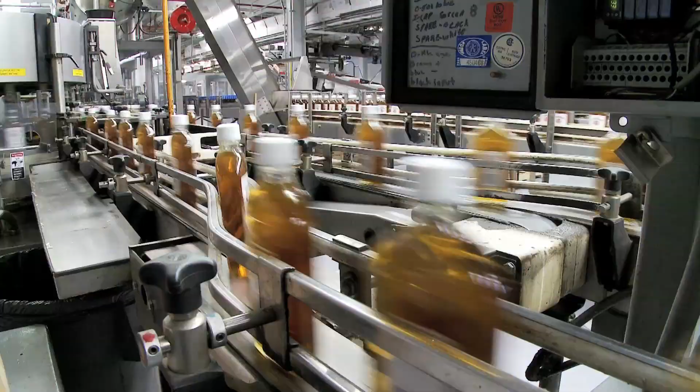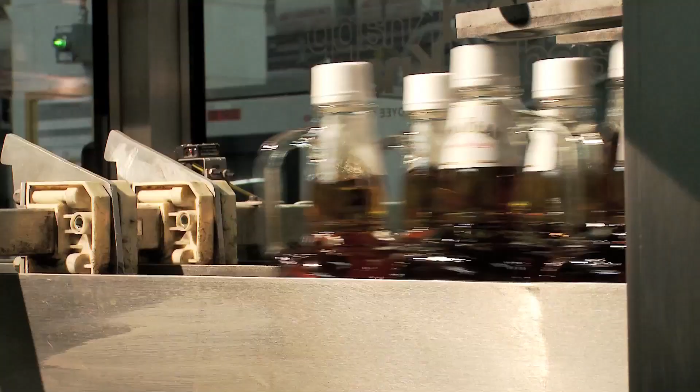Jim Beam Bourbon has stayed true to its original recipe for over 200 years, and as time and technology marched on, the manufacturing processes at the Jim Beam facility have kept pace. This brand-led company relies on strong leadership to invigorate and enhance the company's way of working.

Since 1992, Wonderware has been Jim Beam's partner for automation and information software solutions. These solutions have been supported by Wonderware Cincinnati, the local Wonderware distributor. Originally, Wonderware software was chosen because of its ease of use and its ability to interface with existing PLCs.

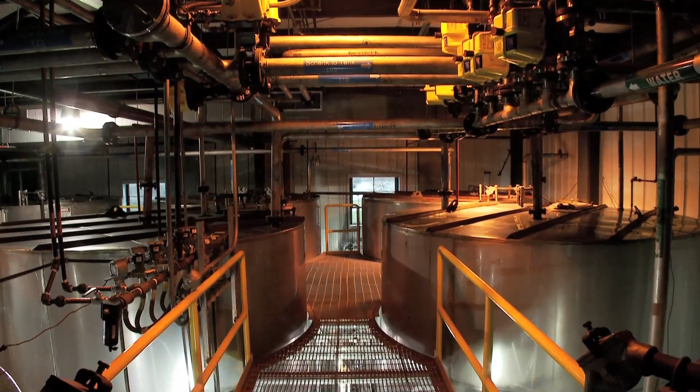A lot of the operators were hesitant when we first introduced Wonderware, but we found that the ease of use is highly important to us with our operators. As we've implemented it in certain areas and the implementations have gone well, we've expanded that into other areas.

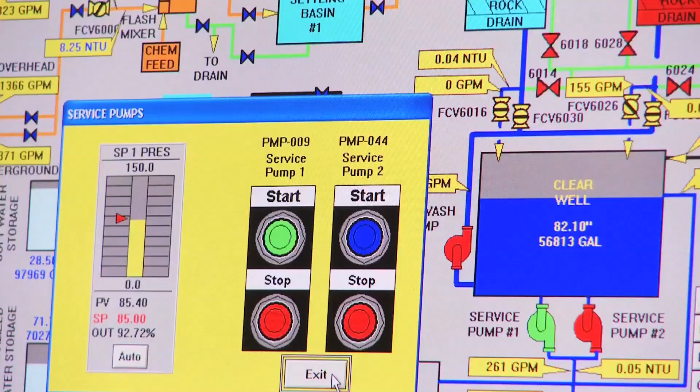The first area I believe that it was implemented was the distillery, and we expanded into our processing and bottling areas. So as we're finding that Wonderware is easy to use, is providing us the data and information that we need, we're able to control our processes consistently, we continue to implement and integrate that throughout our entire system.

As the strength of Wonderware software became apparent to the folks at Jim Beam, it was integrated throughout the plant and has become the software standard.

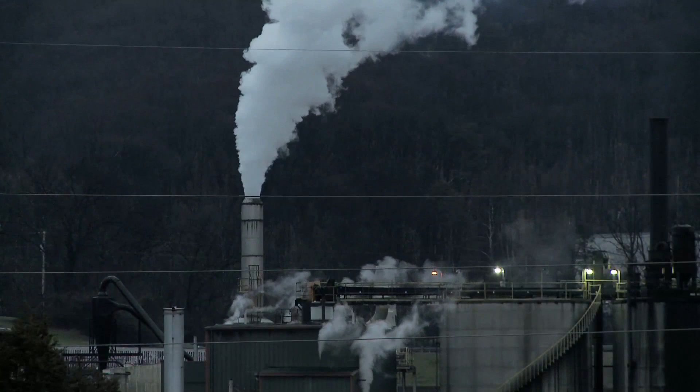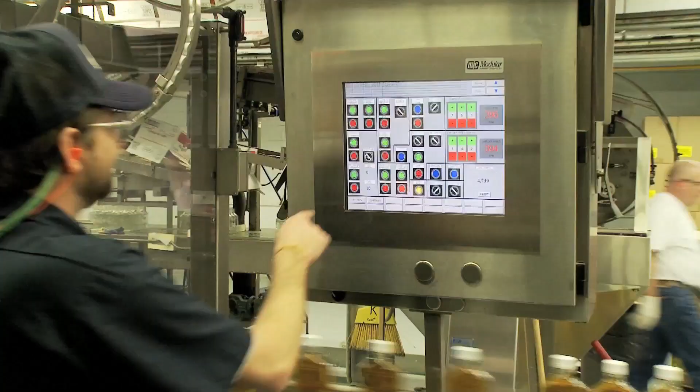In 1994, the dry house at Clermont was automated using InTouch HMI. In 1995, the first InTouch software was added to the bottling line. In 1996, the distillery at the nearby Booker Noe plant was automated using InTouch HMI.

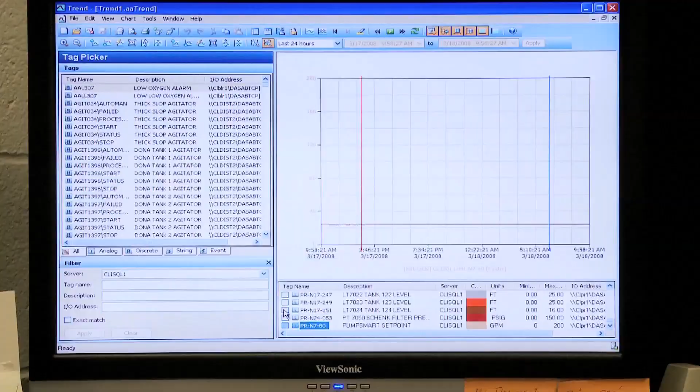The Wonderware Historian software was added in 1997, and once the usefulness of the Wonderware Historian's real-time and historical database capabilities became apparent, the software was added to the rest of the plant. This database tool, coupled with Wonderware Active Factory Trending and Analysis software, have been used for quality and troubleshooting throughout the plants ever since.

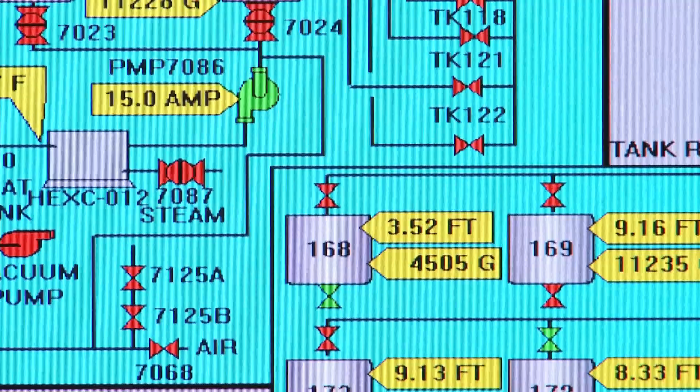With AppServer being a galaxy where all the information resides, we have the boiler, the dry house, and the distillery. InSQL stores all the trends together, and that's one global database for a historian. AppServer kind of does the same thing with the tags, which makes it easier for communicating back and forth between the different operations.

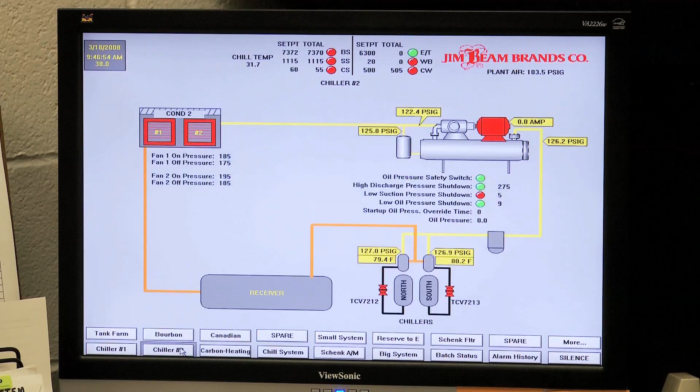In 1998 and 1999, InTouch software was added with the automation of the Jim Beam facility's water and wastewater treatment plant. In 2001, InTouch HMI was included in the automation of the chilling process.

In 2003, terminal services for InTouch software was added as the visualization software on 2 more bottling lines. Also in 2003, the Wonderware Industrial Application Server was chosen for the expansion of the Booker Noe plant.

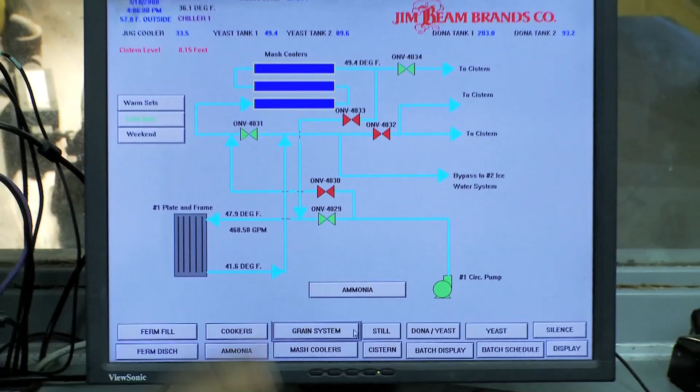The Jim Beam facility in Clermont, Kentucky produces a number of well-known brand spirits, including Jim Beam Bourbon and Knob Creek Straight Bourbon Whiskey. One of our goals in building brands that people want to talk about, it's important that we align ourselves with partners who share some of the same philosophies and goals. We feel that through our partnership and relationship with Wonderware, we've been able to do that.

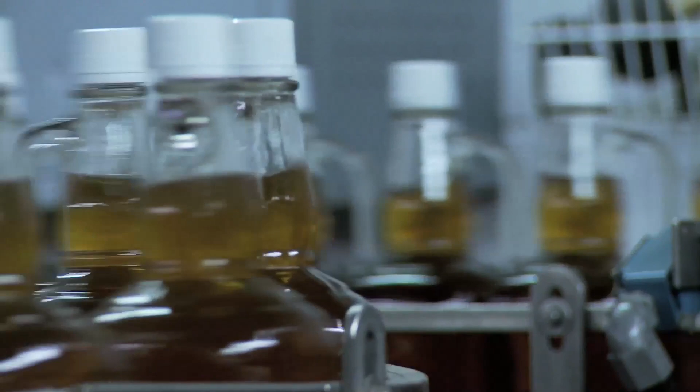2 of the critical underlying principles of Beam Global are to uphold high principles and social responsibility and to strengthen our partnerships. Working together with Wonderware helps enable Beam Global Spirits to bring their vision to life, uphold their commitment to responsibility, and to have a true working partnership with Wonderware to build brands people want to talk about.

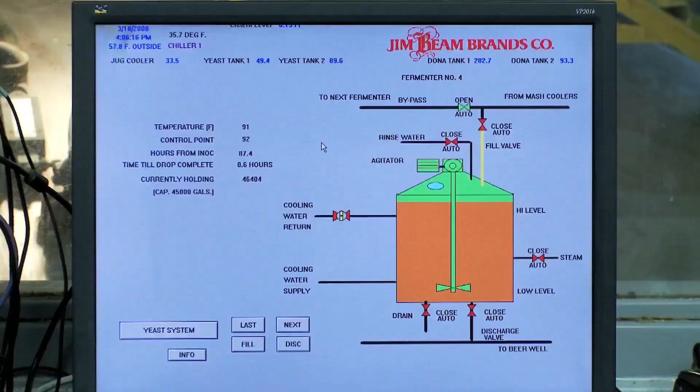I guess our biggest factor when we first started was understanding our process and trying to get it to the computer. Our process was based off of a lot of manual work, and that transition into the computer took us a little while.

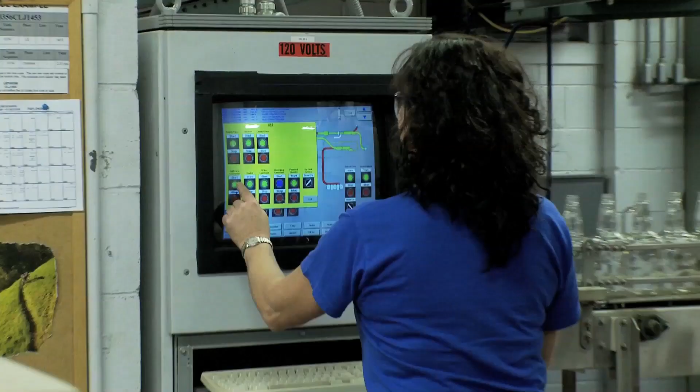But for the operators to be able to run it, they adapted quite well. Within a month, they started to help input ideas to make it a little bit easier to run. Between the work of our engineering department and your tech people, it came together.

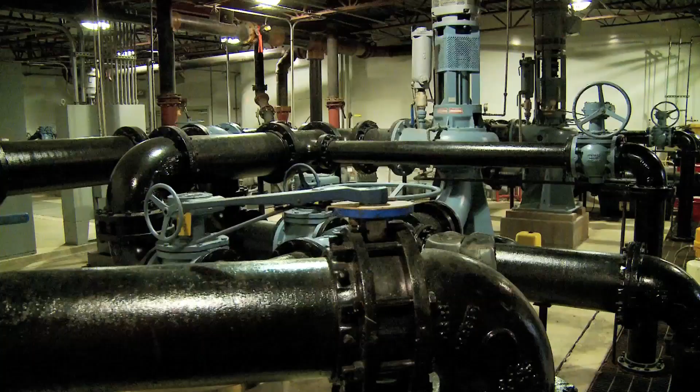Wonderware software solutions are integrated throughout the production process, from the water plant to the boiler house, from the distillery to processing, and finally the bottling line.

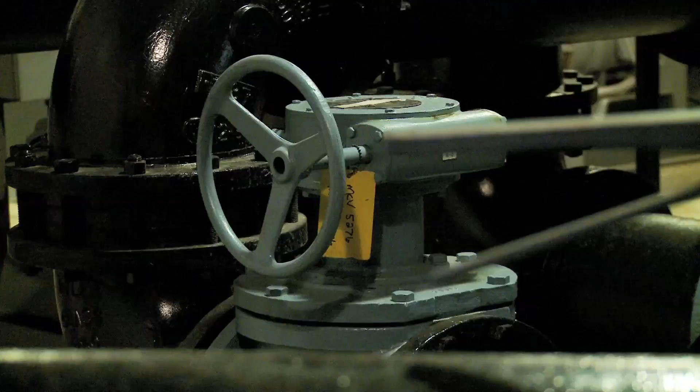But things weren't always so automated. One of the main reasons we installed it was for automation. Prior to Wonderware being installed, a lot of the processes were manual. We would have to manually turn on valves, switches, pumps. It allows the operators, instead of being in different areas, to control the process from one location, and through that provides us a lot of consistency.

In the beginning, one of the issues we had was the inconsistency in our mashing process. They were always up and down. So with Wonderware, we were able to get a consistent drop in materials into the cooks. The cook times were more regulated. Vast improvement. Throughout the plant, at every step of the process, Wonderware software is an important tool.

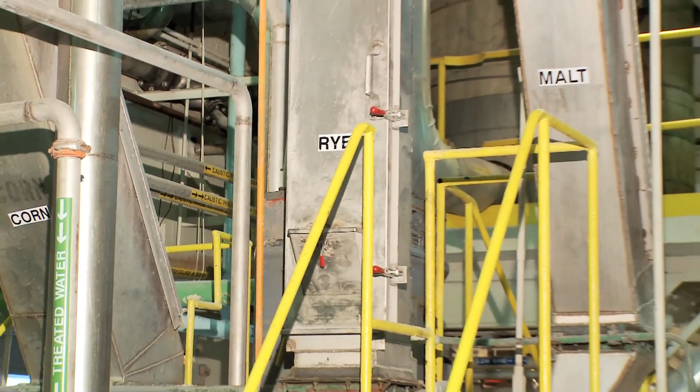The process begins by bringing in corn, rye, and barley malt grains. Even at this early stage, Wonderware software is used to distribute the deliveries of grain to specific silos. The grains are milled and mixed with water to form a mash.

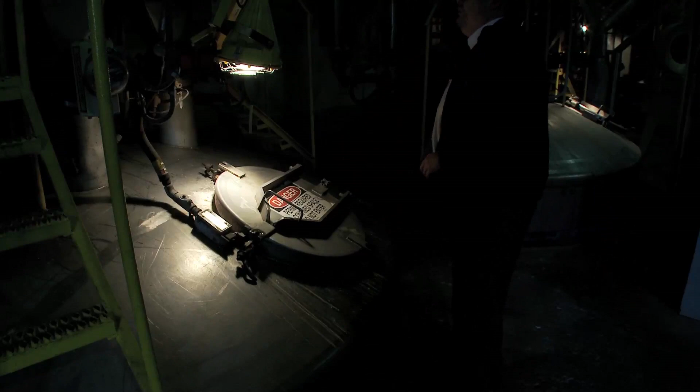This mash is heated to convert the starches to grain sugar. Yeast is added to the cooked mash, which results in fermentation and the conversion of the grain sugar to ethyl alcohol and carbon dioxide, forming distiller's beer. Wonderware InBatch software controls the cooking and fermenting.

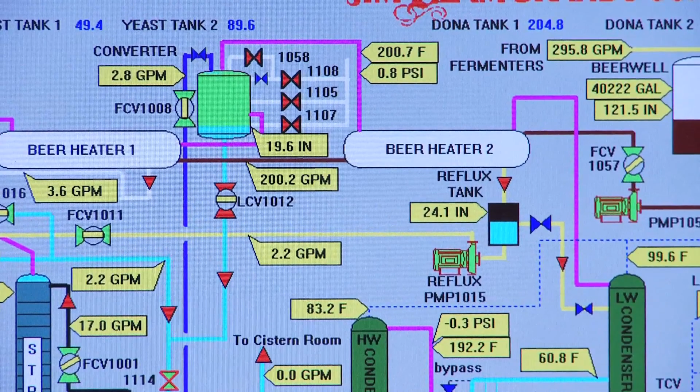The beer goes through the still where the alcohol is separated from the grain. Here, Wonderware InTouch software is used to control the entire distillery. From there, the alcohol is put into new charred white oak barrels where it is aged for up to 10 years. The bourbon in the barrel is dumped, chill filtered, then bottled and shipped, ready to be enjoyed in moderation

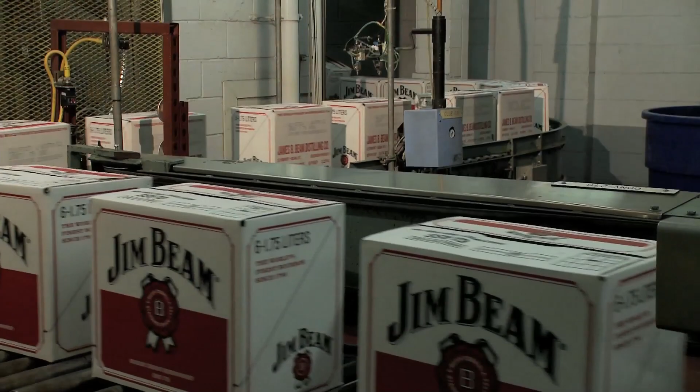by responsible, legal drinking age consumers. Wonderware software's ability to control every aspect of the plant's production helps Jim Beam run a consistently high-quality product more efficiently and have a more profitable business.

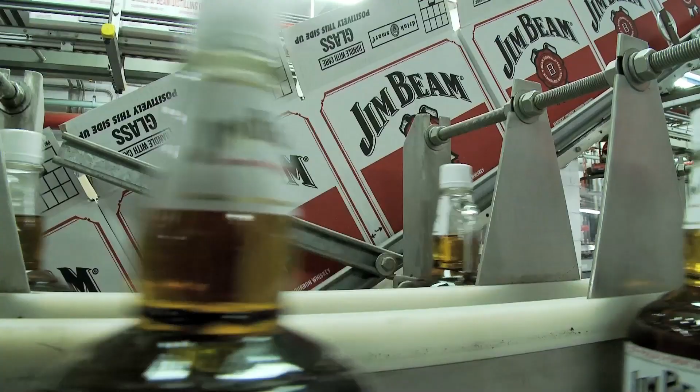I guess a good example of that is the InBatch application here at Clermont. At the end of each week, we struggle to get our mashes out on time, and with the implementation of InBatch, we're able to do at least 2 more fermenters a week and still get out on time. So it's a big measurement factor for us that if we can produce more product in the same amount of time, it's a very big cost savings there.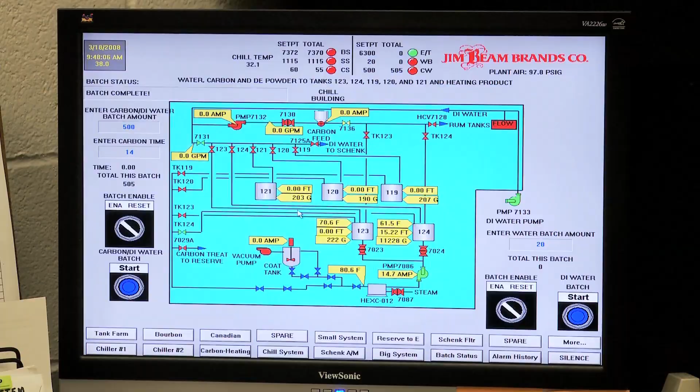As Wonderware software continues to evolve and mature, upgrades to the system can be made effortlessly, providing improved tools for the production process. We've continued to use Wonderware since 1992 because of the ease of upgrades and because of Wonderware's consistency and the product working well. In regards to metrics, what we're seeing is a consistency in throughput.

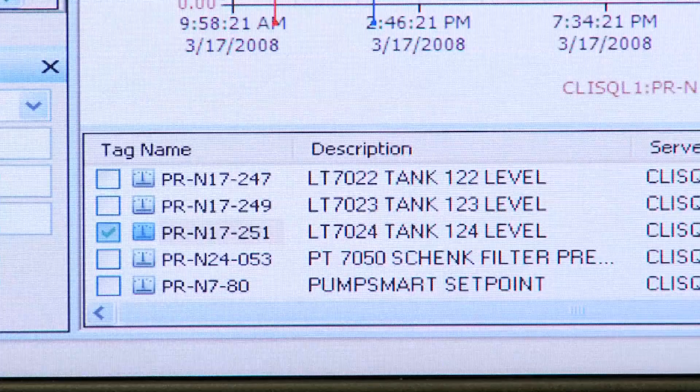Through the trending information, we're able to tell when problematic areas arise. And by having that information readily available and automated, we're able to take preventive action in order to maintain a consistent operation.

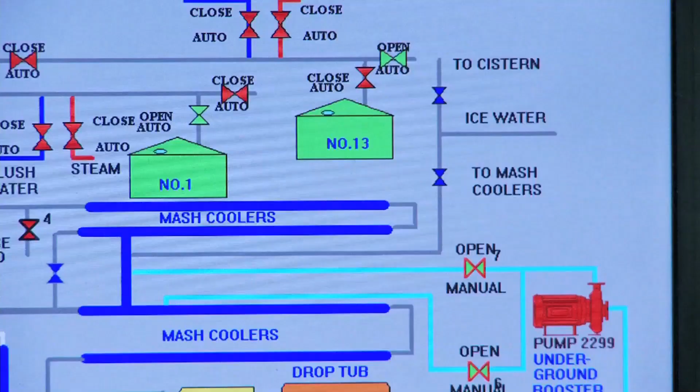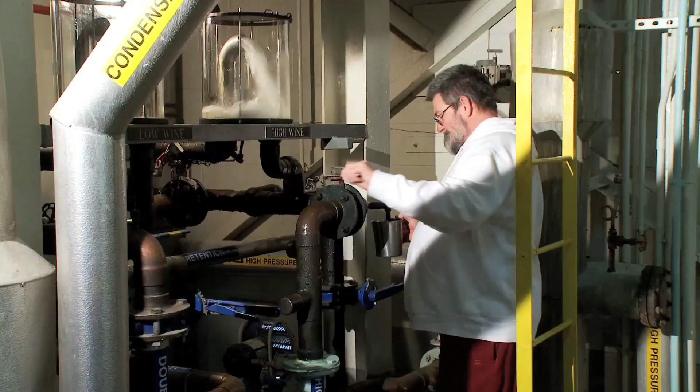One of the variations we used to have in our manual system was that our chemistry was up and down. It was one of those things where an operator pushed the wrong button, or an operator adjusted this, or there was a little bit more grain here. So once we implemented Wonderware, the consistency of our chemistry came together. We had less highs and lows. It kind of leveled things out, which in turn made a better product.

And a great product is what they make at Jim Beam: quality Kentucky bourbon made from a secret recipe that's more than 200 years old. Old-time bourbon with a modern touch and a little help from Wonderware.